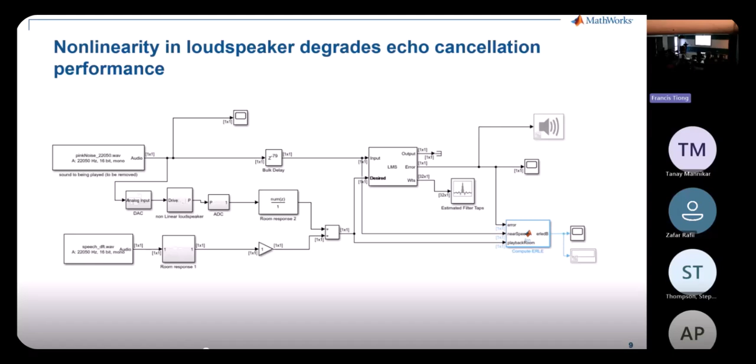So another motivation of mixing signal processing and acoustics in analog is this, as an example. In this active loudspeaker system, you can actually put in a neural network controller. This is a Simulink simulation that allows you to put in a neural network together with an analog system, a loudspeaker.

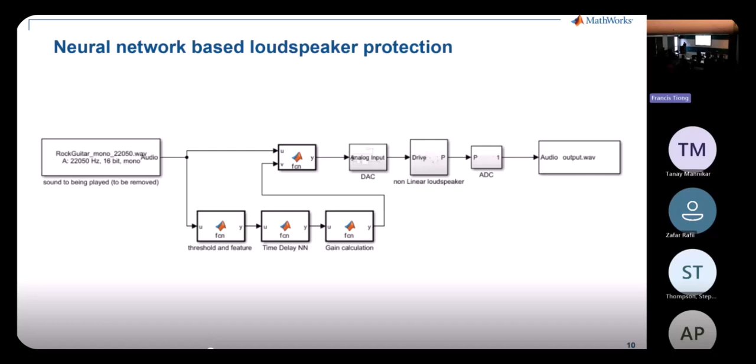And with the protection scheme on, now you can crank up the gain and try to increase the loudness of your speaker to the maximum without worrying that it's going to crack or damage the system. So it is needed. I would say all active speakers would have a protection scheme inside. So that's the motivation. And this is the agenda that I will be talking about tonight.

I have shown you a loudspeaker model for DSP applications. This is followed by a brief introduction to the acoustic library that I've been using and how it came about. And after that, I will show you an earbud example, a speaker model that's modeling, for example, the AirPod in your ears. And after that, these are all models, but how do you get the parameters? We have the optimization toolbox that can help.

And this is getting a little bit more into modeling and tuning a loudspeaker enclosure. Now that we have a way to simulate an analog system, it is straightforward and fun actually to tune a loudspeaker enclosure. I was building my own loudspeaker box before, but now with a way to simulate the whole thing, you can do it in simulation mode first, and it saves a lot of time and it's fun to do.

And the last item is that the acoustic library allows you to simulate sound propagating through certain structures. And I will show you quickly how that was done. So this is the acoustic library that I've been advertising. It has been released on the free exchange site MATLAB Central. You go in there, you can download this library, and there are all these components that you can put on the canvas, connect, and play with.

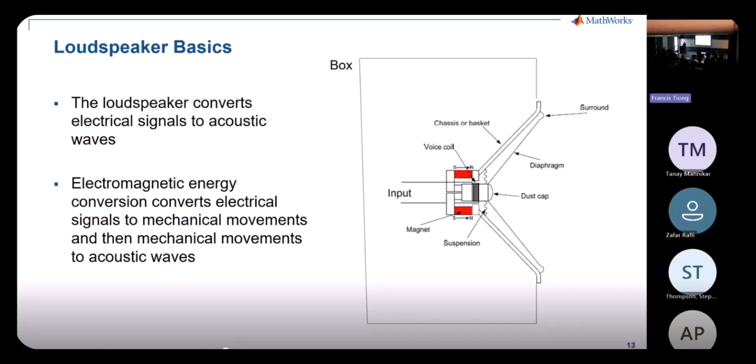The coil will have a magnetic field, and this magnetic field will move the whole cone and the diaphragm front and back. And this movement is a mechanical movement. This movement will push the air in the front, creating sound. And that movement obviously is affected by the enclosure, the box behind. That's the whole loudspeaker modeling side that I'm talking about.

Now, in the model, the loudspeaker is essentially being modeled with all these lumped elements. You can see the blue section here is in the electric domain. I model it, I even include inductors and resistors, and then this will be followed by a simulation in the mechanical domain, where it's being simulated in a mass, spring, and damper model. And then in the end, there's the acoustic domain. In the acoustic domain, we have inertance and compliance that look like an inductor and capacitor. So this is a multi-physics simulation.

So let's step back a little bit. Now in this whole system, I have discrete time and I have continuous time. In the continuous time, I have multiple physics. And this multiple physics simulation side is a subset that we call Simscape under Simulink. So in Simulink, when we want to simulate physical elements, it's under a subset called Simscape. Some people were asking, what is Simscape?

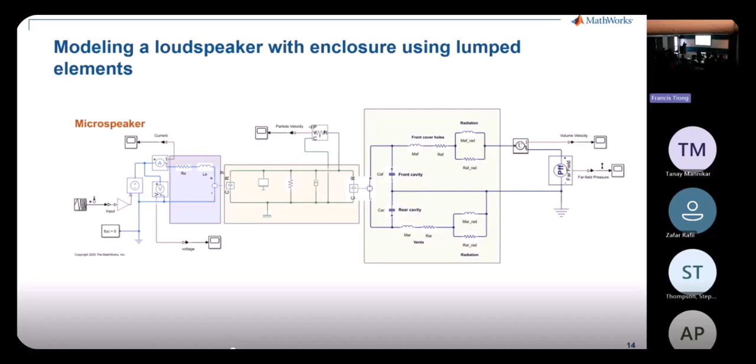They got confused. And so this whole model can be written like code and collapsed into one component. And this is what comes with the acoustic library. We have a micro speaker component. So this slide is the same as this slide. Now we have one component, and we can use this component to build more complicated systems, like this one.

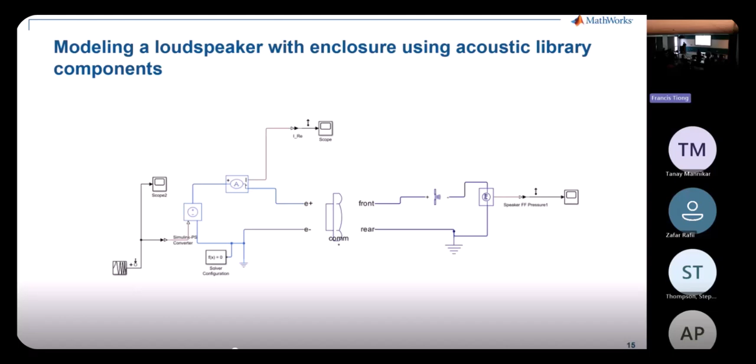So what's the advantage of simulating the whole thing? Now you can tune your design. You can adjust to see, what if I make the back hole a little bit bigger? Or what if I put a denser screen in the front? What is the net effect on the frequency response? So now you can tune these things, you can adjust them, and that's another reason why people want to simulate acoustics using lumped elements.

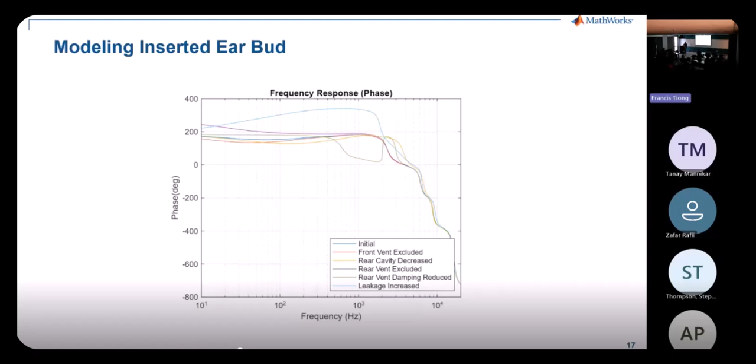And basically, one thing is it's a one-dimensional simulation. It's simple, it's easy, and it's not like these three-dimensional tools where you have to put in a lot of details on the materials, and you need CAD, you need all these to simulate something simple. This is intended to be something simple so you can screen out 95% of your errors or tunings fairly quickly before you go into a really detailed model, if you still need to.

So this is my simple example for simulating a loudspeaker box. And this box has one ported output. You can see that in the simulation, I simply use the driver component. At the back of the speaker, I connect it to a box. In the box, there's a port output that I pull out. And then I have two air loadings attached to it before I measure the sound pressure.

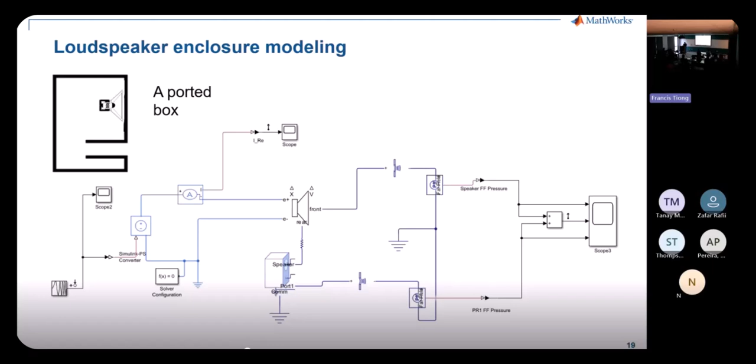For those who are interested, this air loading is based on Beranek's model, which is frequency dependent. The impedance changes according to the sound frequency. So for a 1 kilohertz tone or 5 kilohertz, it's different. So anyway, this is a simple example.

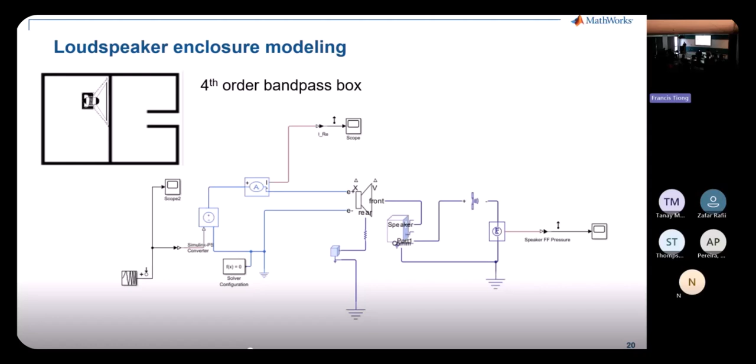I have another example, the fourth order bandpass box. Now this one is interesting. It's got a closed enclosure in the back, and in the front there's another chamber with an open port out. In this case, you can see that it's intuitive to simulate this system. In the back, I put a box. In the front, I put in a port and measure the output. So hopefully this is an easy way for people to move forward and try out new things.

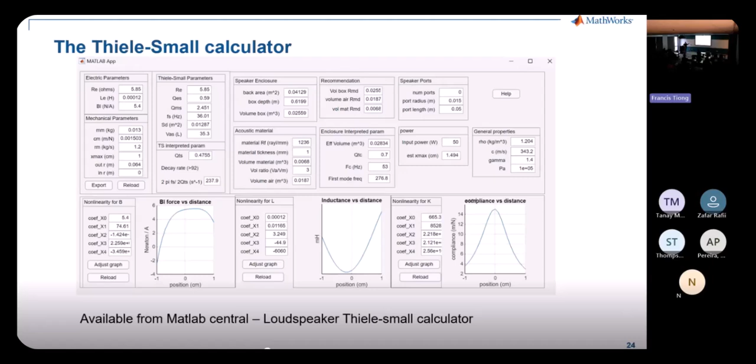Shown here are three graphs. These are the nonlinearities related to the loudspeaker: the B field, the L field, and the K compliance field. People can get these polynomials when they measure, for example, using a Klippel measurement. All these you can apply into our loudspeaker model, which allows you to choose whether to include these nonlinearities or keep it linear. It's all flexible.

Now, there will come a time where you have some measurements and you want to put them in the model, but you don't know what values will match your actual measurements. In those cases, well, we are MATLAB, so we have Response Optimizer. It's under the optimization toolbox and will help you adaptively find the proper parameters.

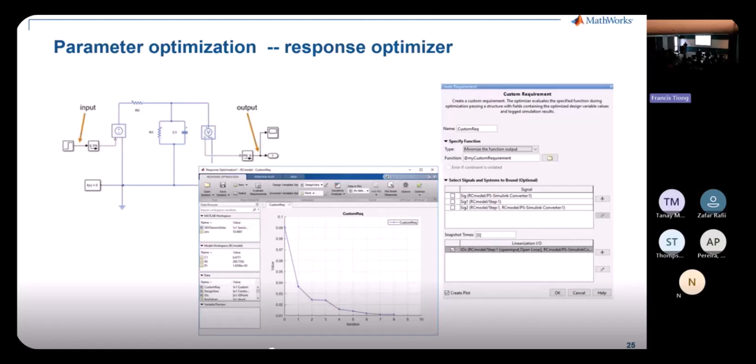On the other side, if you have a design and you want to optimize, for example, your frequency response, and your degree of freedom is maybe only the weight of the coil, you can also use the optimization toolbox to find the best value to achieve your criteria.

Now, I want to quickly talk about tuning a loudspeaker box. This is a simple loudspeaker box. If I don't have a port open, then it's a closed box. With a closed box, it might be harder for the driver to push air because it's sealed off. So the resonance frequency of the driver will be pushed higher, meaning the low frequency sound might suffer. You might lose a little bit on that.

To get it back, you can open a port, and the effect would be like this spring model here. You have sound going out the front, and also sound going out this port, and in between you have a spring. At a certain frequency, those two will be pushing in the same direction. That's what we want: to tune the port so the air is pushing out in the same phase. If it's a different phase, it might cancel some of the sound intensity, which defeats the purpose.

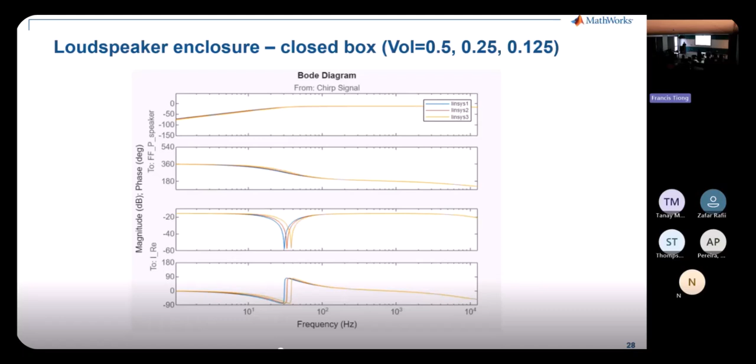So that's what I meant by tuning. You need to adjust the dimensions to achieve what you want. This simulation shows that with a closed box, as the volume gets smaller, I'm pushing the resonance frequency up, this yellow line. You can easily see it in the simulation. By putting a port in, I have created a new mode, and therefore the net frequency response can be pulled lower. So that's the whole idea.

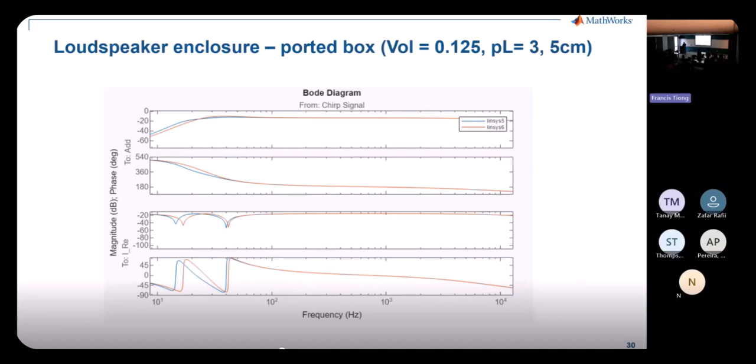Okay, so similar to solving electromagnetic structures, there is a popular finite difference time domain method. We can apply a similar method in acoustics, meaning that we can simulate the sound going through a tube by assuming it as a concatenation of a basic acoustic element. Each of these acoustic elements is modeled by this T model with inertance and one compliance. So this way of simulation is what I call an FDTD approach.

But we already have a component that's doing something equivalent. So we have a component going through this tube-like structure. You can specify how many segments you want to build, and you can then simulate it and get the response back from this tube. Like what is the resonance frequency of this tube? How many modes you get? Stuff like that. Now by tube, notice that it's not confined to be a cylindrical tube. It could be a rectangular type.

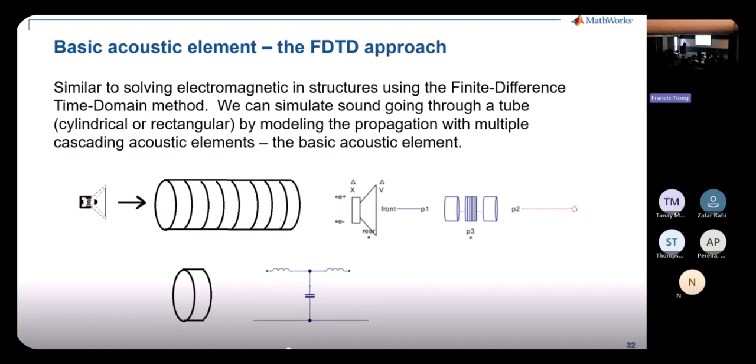Okay, so losses. There are two main losses. One is the viscous loss that comes about by the back and forth motion of the acoustic particles, especially closer to the wall. The other one is the oscillating pressure going up and down, so minute temperature change while it's flowing through, and that will also create a loss. These two losses are frequency dependent, so 1 kilohertz will not see the same loss as 5 kilohertz.

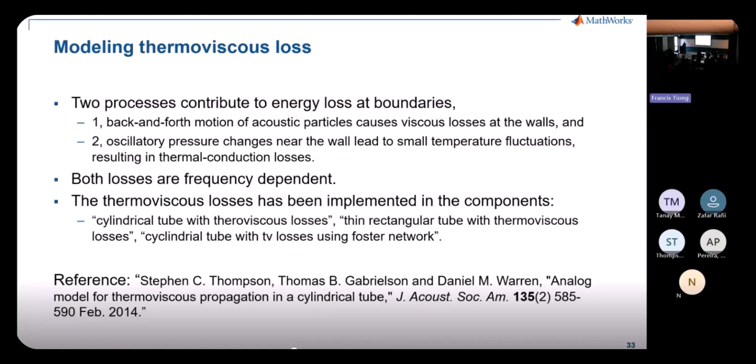These losses we have already included in the model. So you can check, say, enable it, and then it will be turned on. And we have these components already including this. The details of this simulation: it's done in time domain, according to this paper by Dr. Thompson. Dr. Thompson has been helping us out with this acoustic library, and he's the one who presented to us last year, and he had this model released.

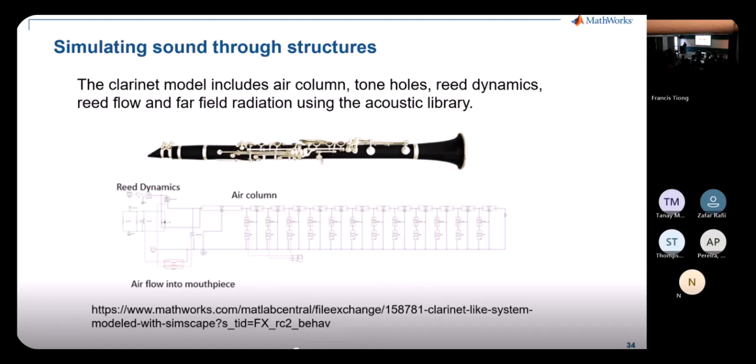This is the clarinet model. It simulates basically sound going through this tube with different finger holes you can play with, and it will simulate it to come out with the same sound as a clarinet. So I hope you'll find this interesting. Do you have any questions?

I'm trying to simulate a bassoon, and I need conical tube elements. Do you have those in your library? What is the element? A conical, so that each has a slightly different radius. Yeah, we have a horn model. You have to simulate FDTD, but each segment is a little bit wider. Yeah, a little bit wider. So I think it's already in the model, but we have a horn model coming up. Okay, thank you. Yeah, I remember you were asking about that. Let's talk some more.

And are these models code generatable? That's an interesting question. The short answer is yes. I've tried it, but you cannot simulate it in a variable time step. It has to be done in fixed time step. With the fixed time step, you simulate using Simulink compiler, and it will run like 10 times faster also. So thank you.

Sorry, I do have a question. So basically, in order to use your library, I have to have Simulink, right? Yes. In order to use the acoustic library, you need Simulink, you need Simscape, and since it's under Audio Toolbox, Audio Toolbox is on top of Signal Processing Toolbox and DSP System Toolbox. Which I think you said you have the suite, right? So you have everything.

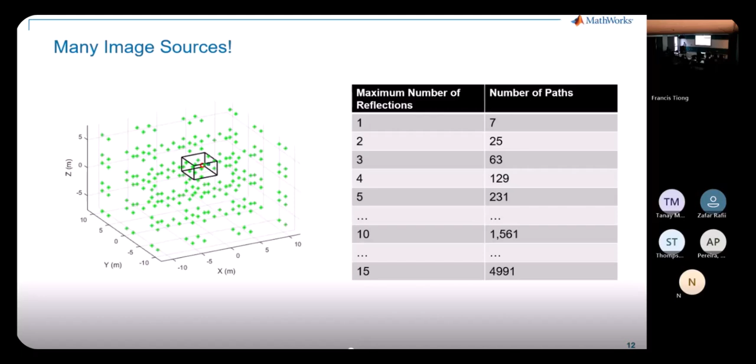The good news: in 25a with Audio Toolbox, you can now use a function directly for this image source method, which is relatively simple to do yourself for the simplest of rooms, a rectangular room. But when things get more complicated, for arbitrary shaped rooms with objects in them, doing all these images is complicated. And something I skipped is that there's an additional step to check that the image is actually valid, meaning that there's nothing between the source, the image, and the receiver, no obstacle. So it gets untenable. So what you can do now is just use a function in Audio Toolbox. I'm highlighting an example on how to do that.

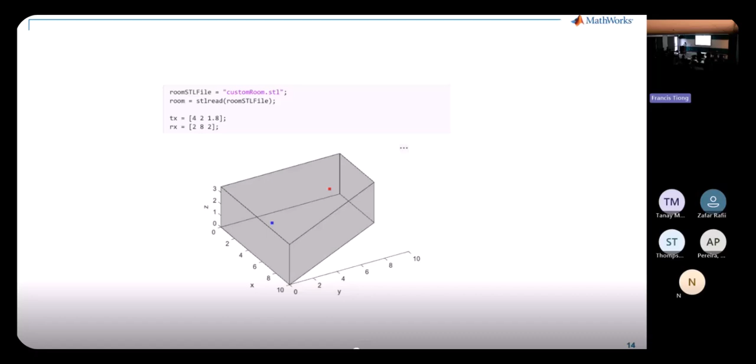Some of you might be familiar with STL files. It's a popular file format to store shapes, rooms, objects, and so on. So what I'm doing here is I'm loading an STL holding a custom room, which now is an object in MATLAB that we can use. I'm defining where the transmitter and receivers are in this room with these points.

And you can now call a new function called acousticRoomResponse, which at the very high level takes the room, the model of the room, along with the transmitter and receiver coordinates. And you can control which algorithm and its parameters. Here I'm just using the image source algorithm, which I just showed you. And I'm showing you the output of this function, which is the impulse response ready for use. This could be consumed in MATLAB using filters and so on.

There's a question. I just want to make sure I understand this correctly. So basically, you have all those impulse responses collected somewhere, then you save it. Then, as long as we give you the geometry, I mean the dimension of the room, then you can provide us the proper impulse response.

This is a simulation. The function simulates. It finds all the image sources and it does the simulation to synthesize the impulse response, if that makes sense. We don't have pre-saved impulse responses that we retrieve. We actually compute it for you, using the method I highlighted very simply for one reflection. We do it for tens and hundreds of images, and this is the result essentially.

So as you trace each ray, depending on the distance traveled, this determines the delay at which you see it in the impulse response. And its power depends on how much attenuation it went through, which is related both to the distance it traveled and to the characteristics of the walls, how much sound is absorbed by each wall or ceiling. So that's all programmable into this function, and it gives you the answer, essentially, which is this IR.

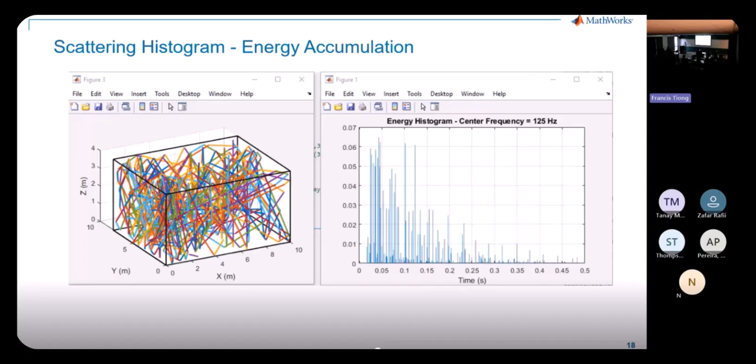Again, you can use the same function and specify stochastic ray tracing. Again, any room is supported. You can specify both absorption and scattering coefficients, and conveniently it returns the impulse response for you. Which one is the scattering coefficient here? Here, I didn't specify any, so it uses some default, which we'll document. But if you have your own specific scattering, you can specify it.

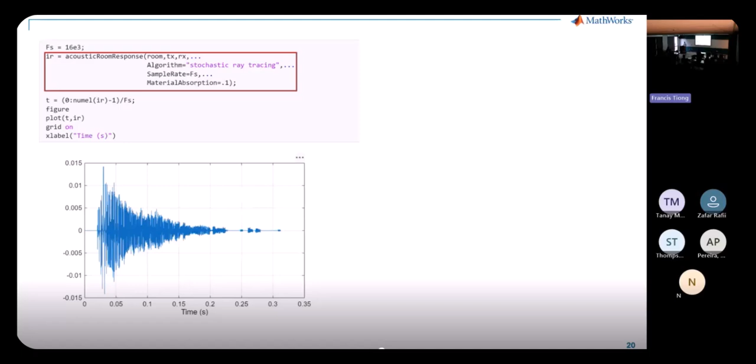I think we assume pretty rigid, smooth walls, so whatever scattering coefficient is there. But if you want... There's a wall property that you put into the geometry definition. Correct. So there's a default for people who don't want to bother. But if you really want to specify all these numbers, you can. Okay, so we talked about that.

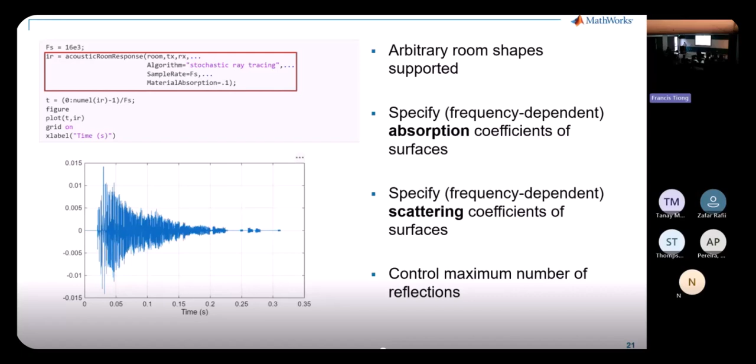The function has a lot of options to control how many rays you're shooting, to limit the number of maximum reflections for each ray. You can increase these numbers at the cost of extra computation. And you can combine these two methods, which is often done. Use image source for the early arrivals, ray tracing for the tail. Combine them together, and you get an impulse response that combines these two popular geometric methods.

Again, you're in MATLAB, so you can take this impulse response, use the filter command or any of our filtering functions, do analysis on it, incorporate it into your simulation. So, all right. So, does this method capture the resonance? No, these methods are good for relatively high frequencies. And that depends on how big your environment is, because it's related to the wavelength. To capture resonant behavior, it's a good segue.

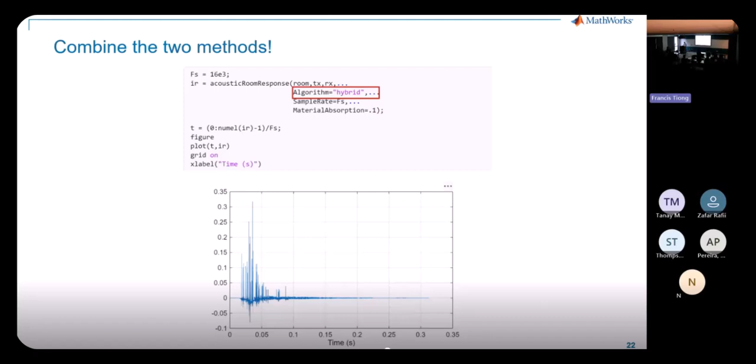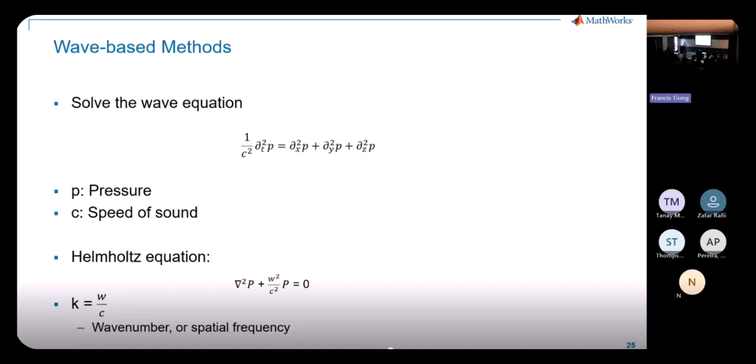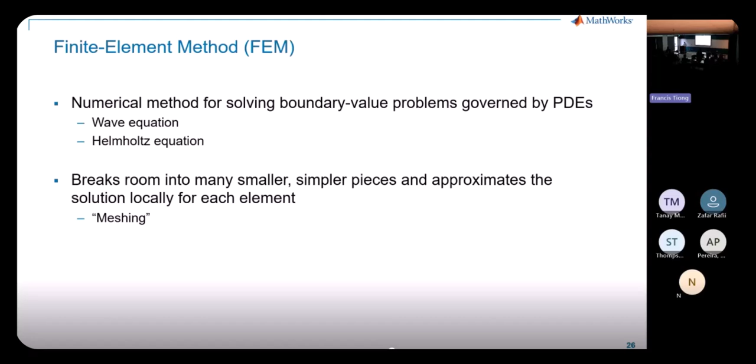One popular method is the finite element method, which at a very high level divides your space into smaller areas and solves this partial differential equation for each of these areas, kind of a divide and conquer approach. Numerically expensive, typically. And I have an example here that will be available in Audio Toolbox soon that uses the Partial Differential Equation Toolbox, one of our products, as the FEM engine. This product already comes with an FEM engine, so I don't have to worry about implementing it, which is good.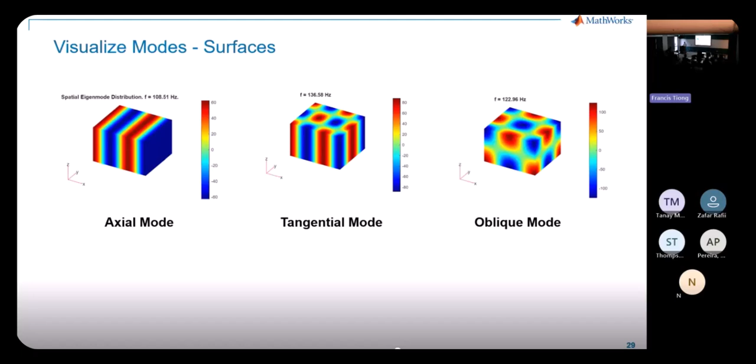Almost done? Okay, so this is the last thing I'll show. You can also visualize the modes in 3D. And the nice thing is that this applies to any room, arbitrary shapes. It's a general solution that you can do.

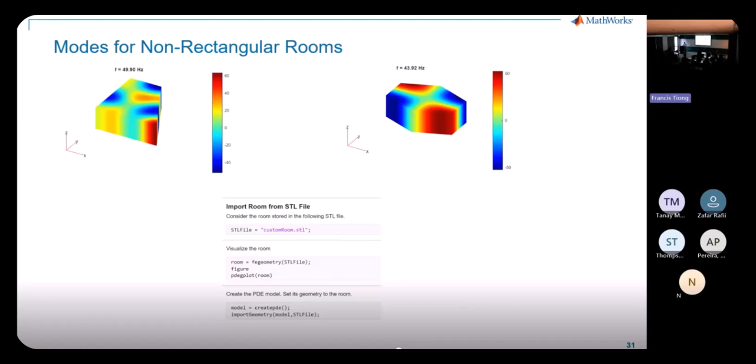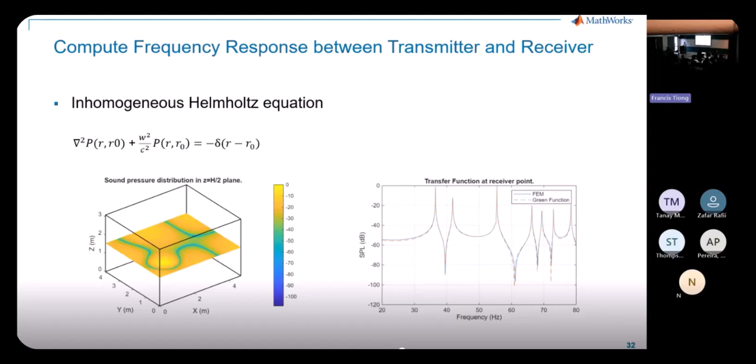The last thing I'm going to show is another example we wrote using PDE Toolbox where we want to derive the frequency response in the room, assuming a transmitter is located somewhere. What I'm plotting is the frequency response for a certain plane. And I'm also plotting results compared to some theoretical values. There's some theory for simple rooms based on the Green's functions, combinations of all the eigenfrequencies, where you see a very nice match. There are a few more slides I'd like to cover on finite difference time domain, FDTD.

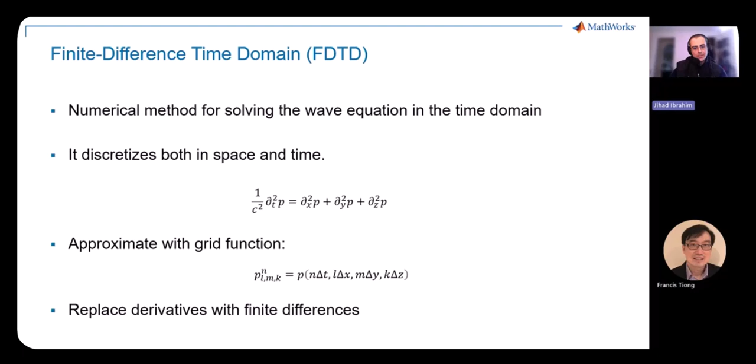...which is another wave-based numerical method for solving the wave equation in the time domain. The basic idea is to discretize the pressure function in both space and time, so only evaluate it at specific points in time and in the XYZ domain using some kind of time and space step. We replace the derivatives from the wave equation with finite difference approximations. Here I'm using second order finite differences.

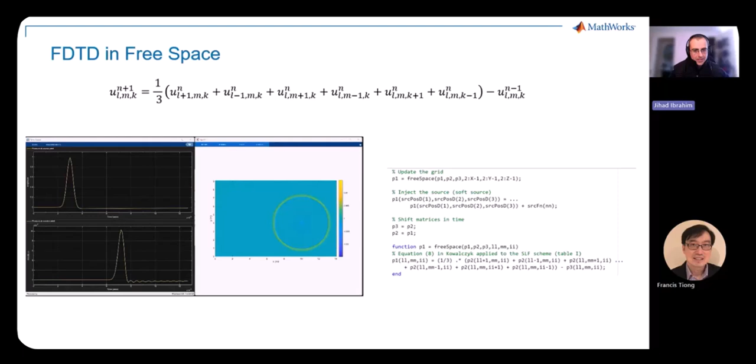So this is a demonstration of FDTD in free space, which is not extremely interesting, but you can extend the same idea and integrate boundary conditions, which I'm not including here, but I have references for you to see where the math comes from, where you can also define what happens at the boundaries, which in our case, in an empty rectangular room, are the walls, the ceiling, and the floor.

So let's run this simulation where I've chosen a high reflection coefficient on all surfaces. What you see at the top is the transmitted pulse. The line of sight pulse is first received at the receiver location. Then as we go forward in time, you'll start seeing reflections off all the surfaces. What I'm plotting, by the way, is a cross section, a horizontal plane in the room, just for convenience.

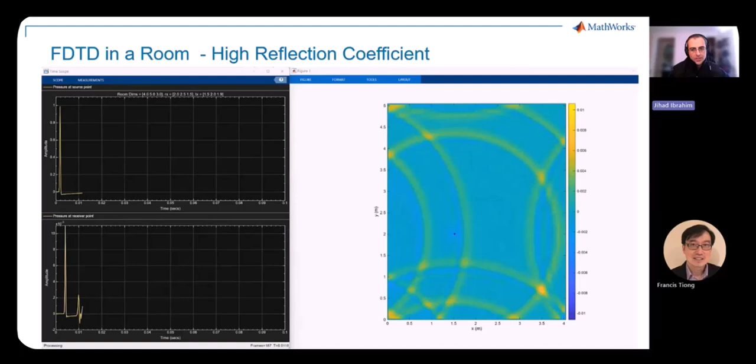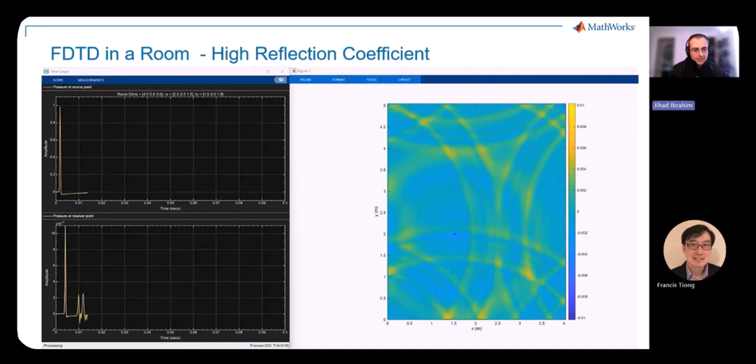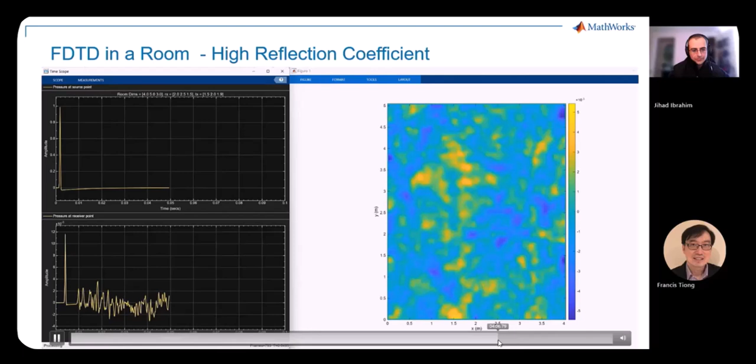And you see all kinds of effects now captured by this method, which are not captured by the geometric method, one of the strong points of this method, at the expense of more computations. You can see on your left the received signal with its reflected paths being formed. You can fast forward a little. Since there is a very high reflection coefficient, things take time to die off here, and you'll see some strong contributions in time. Okay, so here is the basic idea.

So that concludes my presentation. In summary, you now have access to geometric methods for sound simulation in rooms using Audio Toolbox in 25a, the function acousticRoomResponse that integrates image and ray tracing methods. And MATLAB is also convenient for implementing wave-based simulations. We saw a couple of examples of FEM using the PDE Toolbox, and I showed you code snippets that show you how to conveniently implement FDTD as well.

Here are some references that capture the literature we based ourselves upon to do ray tracing, the image source, as well as FDTD and FEM.

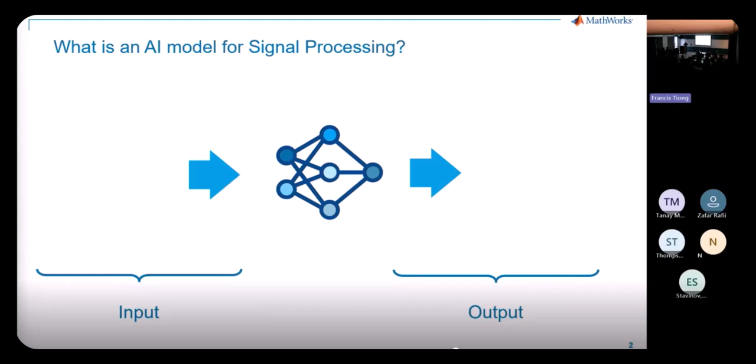So first off, just a little bit of basic context. What do we mean when we talk about AI for signal processing and AI for audio? So we're talking about bringing some sort of signal into an AI network. That network does something to it and produces an output. And in many cases, the purpose of an AI network might be to classify something. So this is when you're, say, trying to label a signal, like maybe you want to identify a sound source, like is it a cat meowing or a dog barking or whatever? We would call that a classifier.

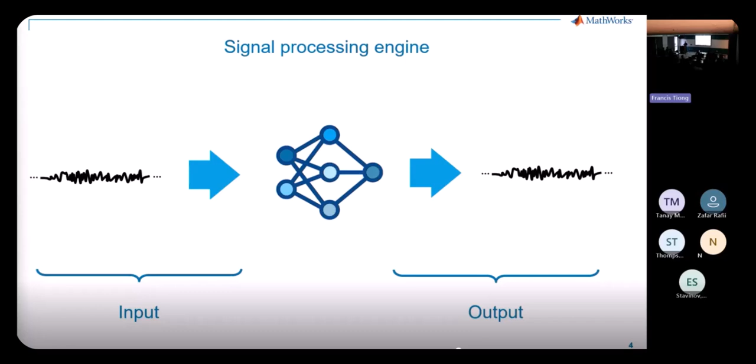In other cases, the neural network is acting as a signal processing engine. So in other words, it's applying some sort of operation to the signal and just producing another signal as an output. This might be like the purpose of removing noise from speech or something like that. In other cases, you're using the network as a means to extract features, and we would call these embeddings.

But one thing to keep in mind is that in many of these scenarios, the deep network isn't actually working directly on the raw audio or signal data. In a lot of these scenarios, there's some sort of pre-processing step in the middle. We would call this maybe a feature extraction, or in this case, when we're doing like a spectrogram, it's a conversion to like a time frequency representation of our signal.

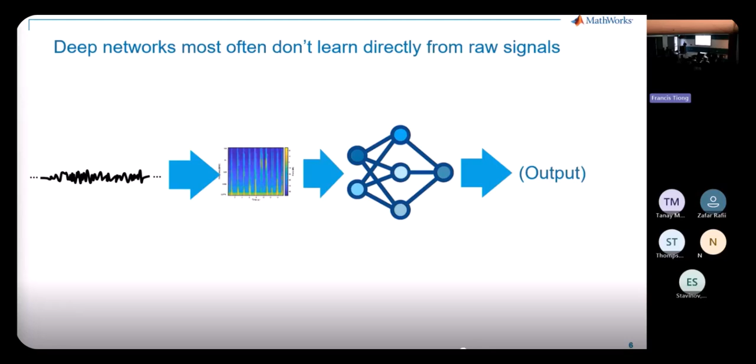So what that means is if we're going to use an AI network and deploy it into the real world, we have to take into account any of this pre-processing. And of course, there's probably going to be some other stuff happening on the back end as well. So when we're talking about an AI application or AI system, it's not just about the network itself, it's about the full kind of signal flow from beginning to end.

So of course, I'm sure most of you in the room are very familiar with spectrograms. This is just what we're talking about with regards to what is the actual signal processing operation that's going on. When we're taking a signal from the time domain into a time frequency representation, we have a sliding window that moves across, capturing FFTs every time that window slides forward. And then from that, we're able to build up this time frequency representation of our signal. And this is often what a lot of these networks are looking at.

Right, so if a lot of these networks are being developed in some of these other frameworks, then why would we want to use MATLAB and Simulink in context with those other frameworks? So one of the reasons is what I just mentioned, is the network itself is just one piece of an overall system. So in many cases, if you're a signal processing engineer, you might really like working in MATLAB and appreciate all the other cool capabilities we have to offer for doing signal processing in MATLAB, and you want to just combine that with AI.

And in other cases, you might actually want to take this system and deploy it into what we call a target, a hardware platform. You're maybe just rapid prototyping, or maybe you're even turning it into like a product that you want to ship in the real world. Of course, you can also develop deep learning models in our tools, so you could do this whole workflow without involving PyTorch and TensorFlow. But that's not the focus of today's session. Today's session, I just want to show you how to take stuff that already exists in some of these other frameworks and bring it into MATLAB and Simulink.

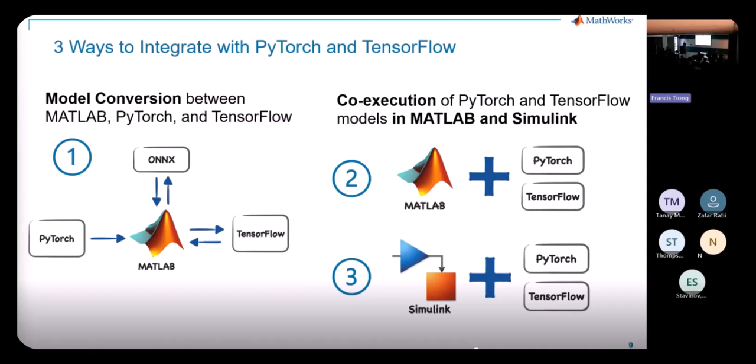The other way of doing it is what we call co-execution. This is where you actually have a Python version of your model running side by side with MATLAB and Simulink. This has some benefits in that you don't have to go through and do any conversion and run into any potential hiccups along the way that might occur when you're doing that conversion step. But it has some downsides as well, which I'll talk about.

These are some of the specific functions that exist for doing this conversion process. So we have two kind of domains or format-specific converters, one for TensorFlow, one for PyTorch. And this is kind of going along with what I was just saying, right? So it's not a perfect situation where every single model out there could be imported, because this is a very quickly evolving ecosystem of tools.

So what we do is we keep track of what's going on out there in these other tools and try to keep adding more and more support for different types of layers and things like that. But that moves very, very quickly. So what's supported today might not be supported tomorrow. So it's a very capable tool, but just being realistic, there's always going to be situations where it's not going to be perfect.

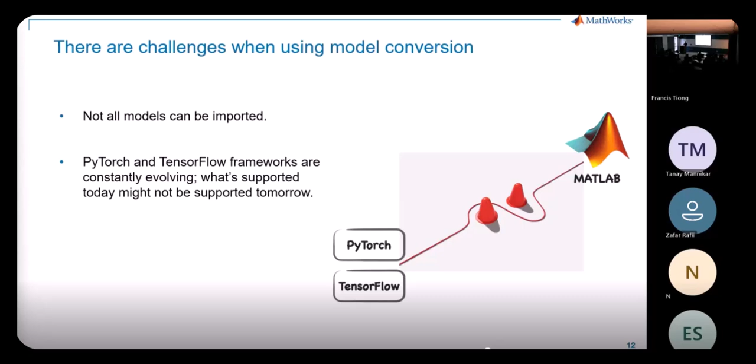So for those situations where you might run into some of those challenges, that's where co-execution can be helpful, because it just allows you to bypass that process of importing. But it has some of its own downsides, which is that you have to make sure you have all the appropriate Python, PyTorch, TensorFlow libraries installed, and you have to do this data type conversion to get the data back and forth between the two different domains.

But we are trying to make this process as easy as possible. So one of the newer things that we've introduced is just having a simple block in Simulink that you can drag a PyTorch model directly into and execute it. And so that's something relatively new. I don't know exactly which release, either 24b or 25a, this capability came out.

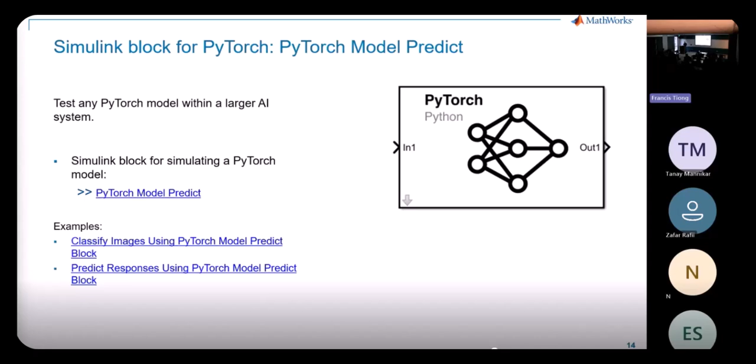All right. But I wanted to focus a little bit more on the importing workflow, because this is what's more interesting, particularly for the cases where you want to put something onto hardware. Because with the co-execution workflow, like we're showing here, you have to run Python side by side. So if you're deploying something to hardware, you're probably going to bare metal, where you're not going to have Python available.

So in this scenario, when you do the import, if you look at the workflow here, you can do your complete modeling and simulation inside the MATLAB or Simulink environment with all that signal processing that we talked about for the pre-processing and the post-processing. There's an additional optional capability if you want to compress your network to make it smaller and meet the requirements of your particular embedded hardware.

And then finally, you can take advantage in this scenario of our code generation to actually deploy it onto the hardware. And not just generate C code, but we have these things that we call hardware support packages that take the generated C code, communicate with a particular compiler, and allow you to download directly to the target, all within the MATLAB Simulink environment. So that allows you to do useful things like testing the performance and then verifying and validating your algorithm on a particular target.

Do you directly support TensorFlow Lite? We do, actually. That's a great question. I didn't include that slide because I already had too many slides, but there's a couple ways you can directly support TensorFlow Lite. The method that we have in the version that's currently released today requires basically a TF Lite interpreter. So that interpreter runs inside of MATLAB, and also when you generate code for a target, like say a Raspberry Pi, that interpreter also runs on the Raspberry Pi. And then when you generate code, you're going to get the model running with that interpreter, but you're also going to get the generated code for everything around it, all the pre-processing and post-processing. Great question. Thanks.

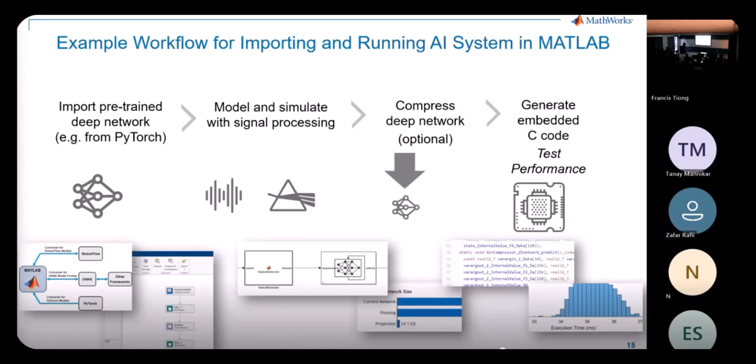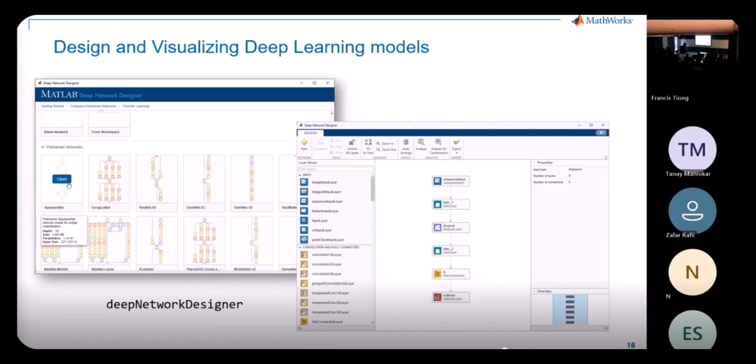So even if you're going through and doing this importing method, there's a handy tool in MATLAB called the Deep Network Designer. And even though designer is right there in the name, it's still really helpful if you're designing elsewhere and then importing, because it has these cool capabilities for visualizing your models. So you get this nice graph view here. And it also has some built-in things for exploring that compression step that I mentioned earlier, where you can analyze a network for compression capabilities.

And we have a few different types of compression: one that we call pruning, one that we call projection. It looks at all the different layers in your network, and it gives you a check if that's eligible for doing a type of projection or pruning, and you get a little X if it's not eligible. And then it tells you the maximum amount of potential pruning and projection available.

Now, obviously, this doesn't tell you the effects of doing that level of compression on the accuracy of your model. So that's where the other capabilities for making this an iterative process become interesting, because you can do the appropriate level of projection or compression for whatever problem you're trying to solve, because you don't want to compress your model down to 1% of its original size if you're going to lose 90% of its accuracy.

Why is softmax not compressible? Why is softmax? I don't know why particular individual layers are and are not, but basically what we would do is go to the documentation page for each of these two different compression methods, and it'll have a list of which layers are supported. But, good question.

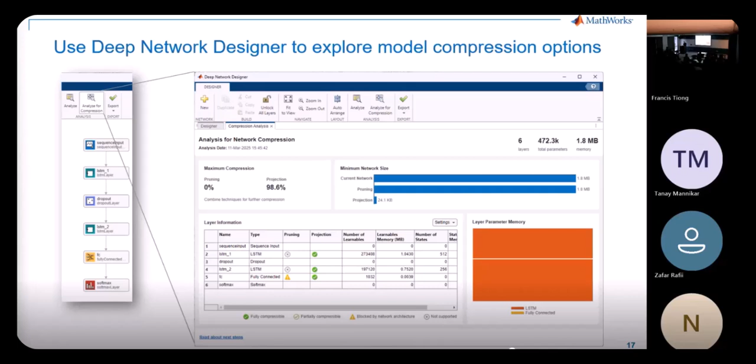All right. So here's a specific example of using one of those import functions. In this case, it's import network from ONNX, but we also have import network from PyTorch and TensorFlow, and then doing that visualization inside of Deep Network Designer, what it actually looks like.

All right, how are we doing on time, Francis?

Okay. So now I just want to go through a few different interesting examples of AI systems, and we'll look at a few different problems that we're solving with AI. So one is speech enhancement. In this case, this was a model that existed in the open source community, and there's a particular paper that was published here, and you can see this is a GAN approach. So there's a generator and a discriminator, and this network existed in PyTorch.

And we went ahead and brought that into MATLAB. In this particular case, we turned it into a function in our Audio Toolbox, where we made it a very convenient, easy to use network, so that you can basically just give it some noisy speech input, and you can get cleaned up output.

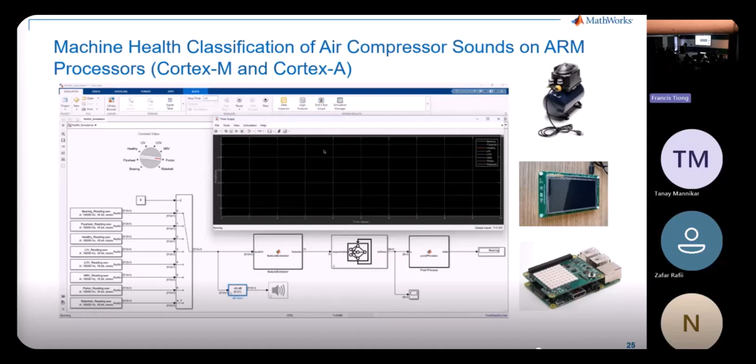Yeah, so exactly. So now that we've got this running in Simulink, we can use one of those things I mentioned earlier called the hardware support package, and we can put it on different hardware platforms. So we've done this for a number of different platforms for this particular model. We have Raspberry Pi, and then this other one here is an ST Micro board, so basically two different types of ARM processors. The ST Micro is a Cortex-M, the Raspberry Pi is a Cortex-A. And once we compile it down, we can measure the performance, which I'll show you in a minute.

Before I show you that, I just want to mention we also applied model compression to this particular example. In this case, we used that projection method that I mentioned earlier. So we started off with a model with greater than 85% accuracy. And the idea was to compress it without sacrificing much of that accuracy. So you can think of it as having a knob where there's going to be a certain sweet spot where you're going to be able to retain enough accuracy, but get enough compression to make it more efficient.

If you're not using spectrogram, what's your time frequency transform? So it's still an FFT that's doing a conversion to frequency domain, but we're looking at other spectral features. We're not just using the whole spectrogram as an input.

And what does it take to make a hardware support package for these? Like if you have your own hardware? Yeah. Good question. So I'd call it a documented process, but not necessarily a trivial one. So you can do it, but usually I'd recommend working with an application engineer at MathWorks to help you through the process.

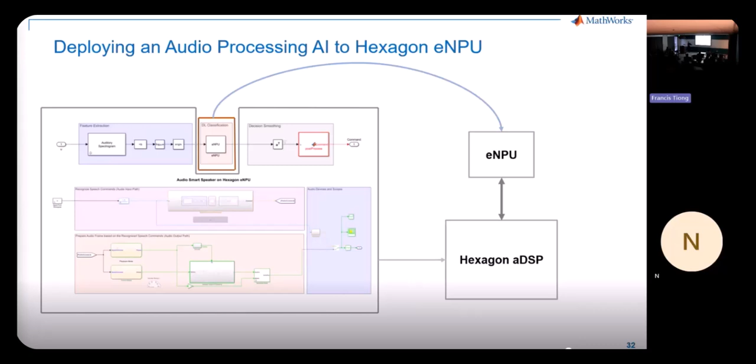I think I'm coming up on time here. Okay. Doing okay? All right.

But just to show you real quickly what the workflow looks like when you're using this. This right here is going into the subsystem for the audio input for the smart speaker. Again, it looks very similar to all the other ones we've seen so far, right? We've got pre-processing, feature extraction. This one is using a spectrogram. You've got the network itself, and then you've got post-processing. Back a little bit too far.

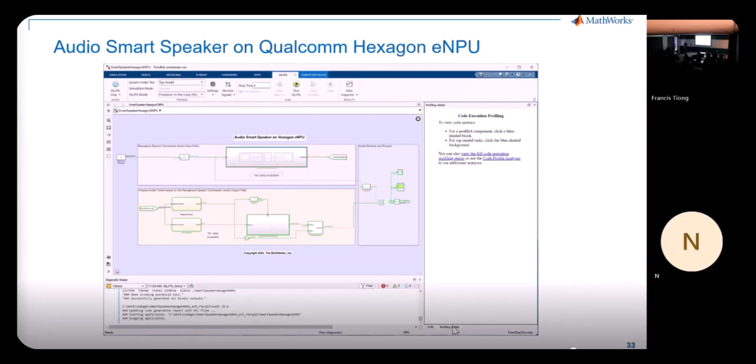And then again, the goal here is to deploy this whole thing onto a Hexagon. When you have this hardware support package installed, it shows up as a dropdown up there. And then it's just a one button click. What that button click is essentially doing is generating code specifically for that platform, and it's also communicating with the Qualcomm tools. So it's compiling and then it's running. In this case, it's running on a simulator.

And that is a benefit because you don't have to have a physical hardware board to understand how much CPU my algorithm is using on a Hexagon. As long as you have the Qualcomm SDK, you have access to a simulator. In this case, we run processor in the loop on the simulator. Even though it's called processor in the loop, it's really simulator in the loop. And we can see we're using about 17%.

All right, I'm done. So just bringing back to the conclusion. So again, the motivation here was to show you how these tools can make it easier to integrate AI and signal processing systems into kind of one tool where you can simulate, debug, verify, and then eventually deploy onto target.

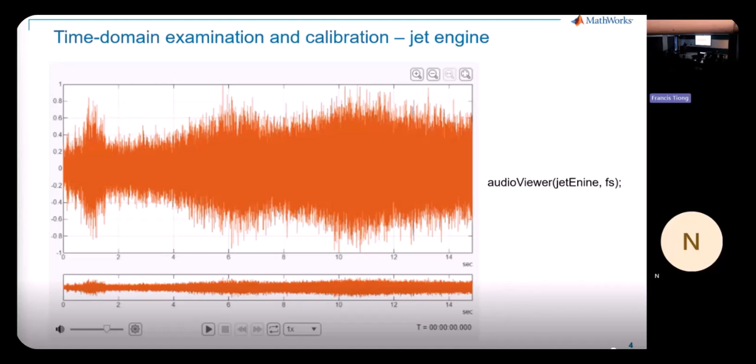So one point I want to make is, even if your recording lasts a few hours, you can still quickly view it because we're not loading all the samples onto the workspace in MATLAB. We're only loading the samples to display on the screen, according to how many points need to be displayed. So it's a fairly good viewer. How is it different to just plot? With plot, you need to load every single point onto the workspace, so if you have a long file of a few hours, it would take up all your memory, right? This works more like a DAW.

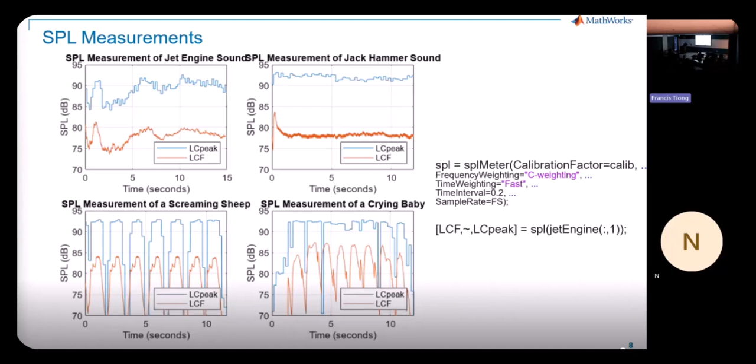In displaying these plots, I'm using C weighting. And I also want to point out this is absolute. This is not psychoacoustic. So this is just directly measuring the level of the sound. Now, in terms of psychoacoustic, we have all these 6 measures. There's the loudness, sharpness, roughness, sense of fluctuation, speech intelligibility, and tone, pure tone sensitivity.

And some of these measures I'm going to use later on, like loudness, sharpness, roughness. These I will use later on to calculate the annoyance index. Now, this particular one, speech intelligibility, I want to point out because there's these two functions, ViSQOL and STOI. That I really like. So bottom line is, for ViSQOL, it's published by Google, and you send a file in, and you can get a MOS score back, a mean opinion score. So that is really interesting.

So when I was working like 6-7 years ago, we had for example a noise suppression scheme made, and we had to hire like 100 people in, everyone listens to it and gives us a rating. And so that rating is essentially the opinion score. And sometimes it's hard to get. And now we have these automated measures where we can immediately get feedback. And it's really, really effective to tune your system.

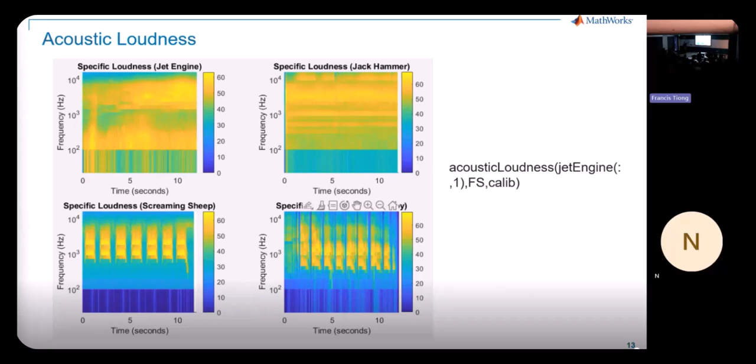Okay, so now back to our fun game here. So this is a compare of the 4 sounds with loudness. Loudness is actually psychoacoustic, so you can have a sense that it's actually related to your perception. I see that there are certain sounds that have a higher level. You can see that the yellow one is higher level. And for this one, maybe it's a jet engine. But we cannot just use loudness and decide that that's the most annoying sound, right? So a possible candidate is maybe this one, loudness is higher. And that's all I can say.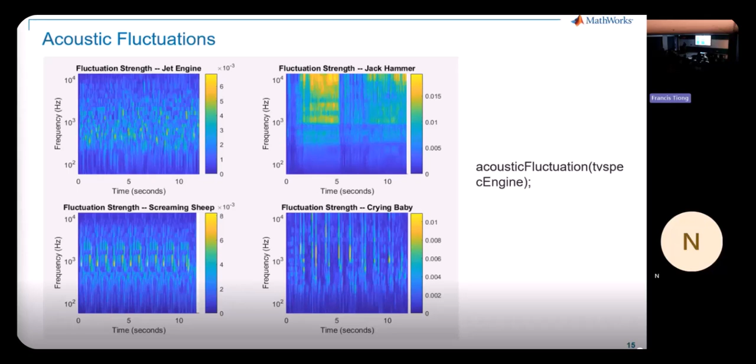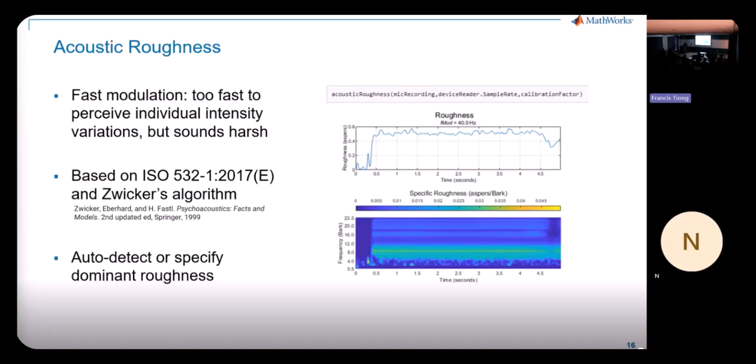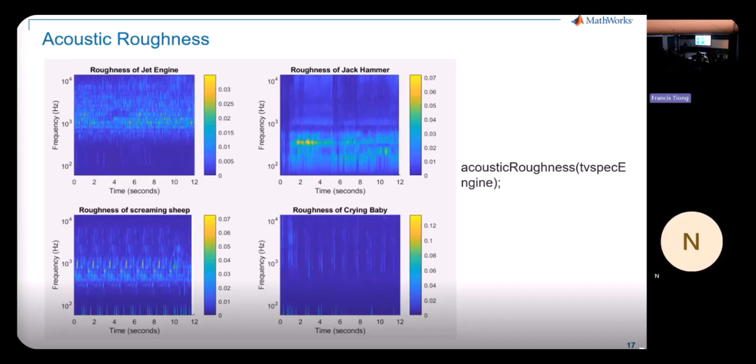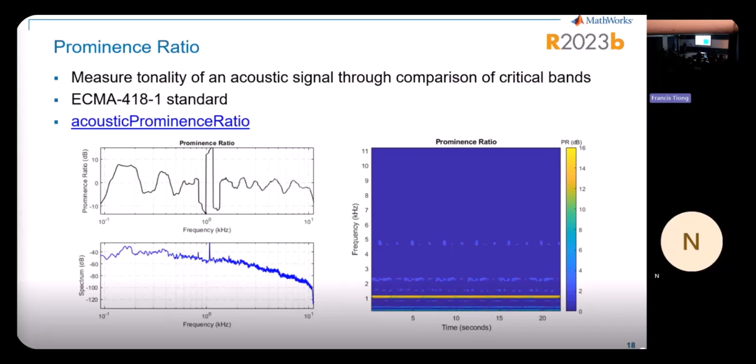And we have a measure of roughness. Roughness is kind of like the modulation earlier, but this one is too fast to perceive individual intensity. Let's look at it here. Comparing all 4, jackhammer again seems to be a little bit more intense than the other 3. There is a prominence ratio. This one is just comparing through, including the critical bands. And this one is interesting. You can see that the jet engine actually has a little bit more intensity.

So with all this, now we come to the last part. This is the psychoacoustic annoyance equation. At the end, I will give you the reference. That's according to a paper. But from this equation, you see that to calculate the annoyance level, it requires the acoustic sharpness measure, the fluctuation, and the roughness. With all these values, you lump it back into the equation, and then you can calculate a PA value out. We have already done all these measures earlier. So now we just plug all the numbers into this equation and find out which sound is really the most annoying.